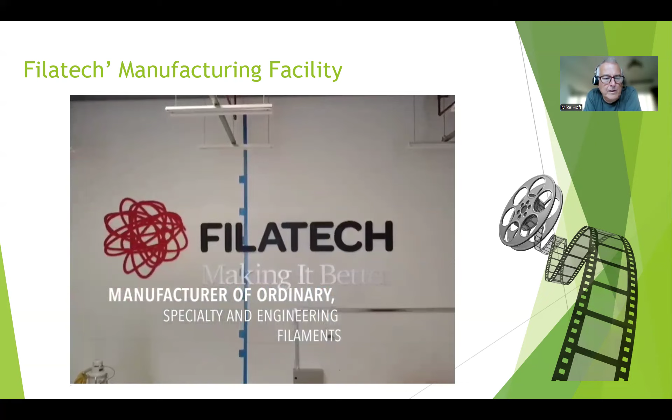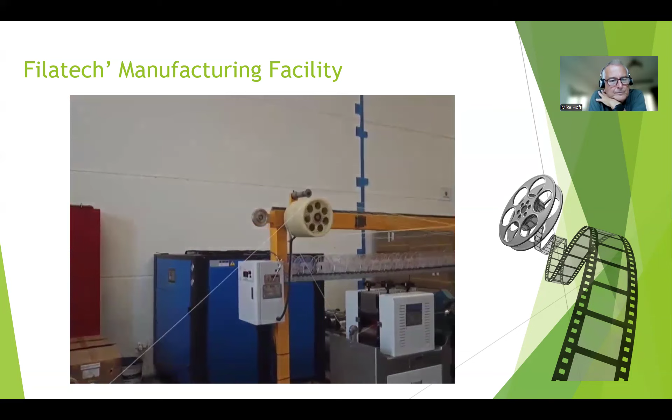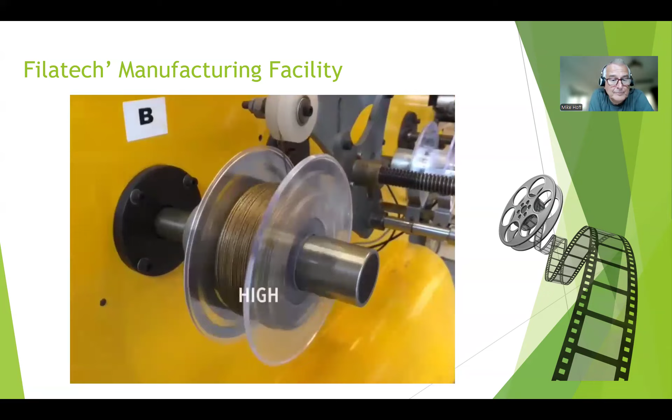Is the sound coming? Okay, how do I share the sound? So what you do is when you share, if you stop sharing and then press share again, under options it says share sound. Can you see that? As you press the share button, I'll take a photo and send it to you. But I'm sharing from a computer, so hang on, let me find it. So under options when you press share, at the bottom you get some options. I just sent the photo of it, you just click the button that says share sound. Unfortunately I don't see anything. I'll say all participants can share. How do I do that? Let me see once again because on computer it used to come automatically. Sometimes it does, share sound. I see that, share sound. Yeah, I got it. That's got it. No problem. Right, hear the sound? Feel like that's it, right. And then if you get stuck...

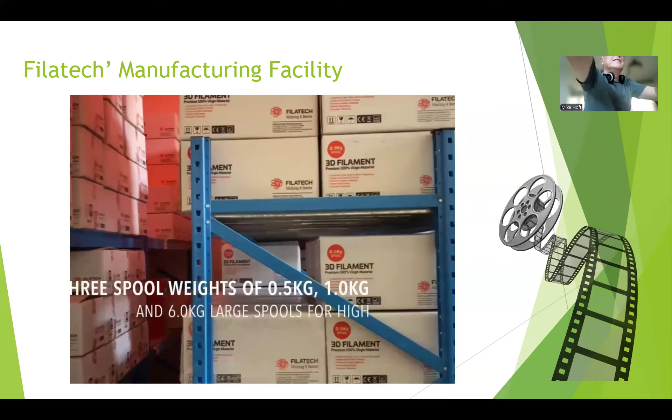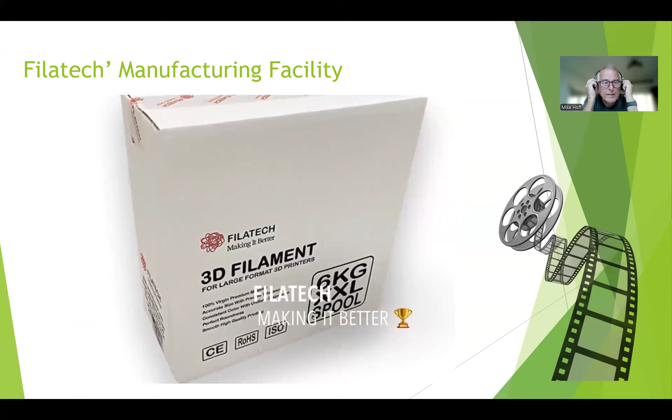Nice, that was our factory where we produce the filaments, which is used as a starting point of 3D printing. That means we start the entire supply chain of 3D printing. We produce the raw material and supply to the end users who use 3D printing machines to make objects, which they then give to end users for their use. So that's what we do, we're the raw material producer for 3D printing, and our product is called filaments, FDM filaments. You will come to know later in the presentation where it is being used.

So we started our journey in 2016 as a company established in Ras Al Khaimah, Al Hamra Free Zone Technology Free Park. In October 2017, the factory started operating and making filaments. In 2018 we started making ordinary filaments and special filaments, which I'll come to later, and we launched two additional products called wood PLA and fila engineering. Fila engineering is a special material used for end-use engineering applications, and some of our engineering materials have very big demand in UK and Europe. Also in 2018, we got a Best New Technology Award from Rakez. And in 2019, we started our UK sales operations.

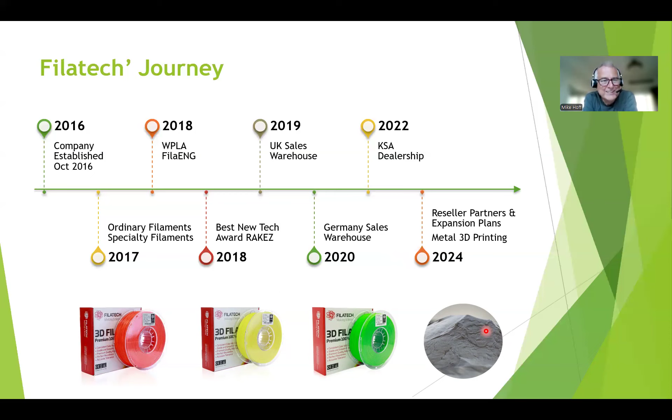Gotcha. For me, 3D printing is like progress. What I say to people is, long back, we used to make houses out of stones. We carve out, we live inside. But now we make in layers. Multi-storied buildings we make in layers, one layer at a time. So that is why I always say when we move from subtractive to additive, we are progressing.

Amazing. That's really good. I like it. I like it.

I'll come to how it is done later. For basics, why it is called 3D printing is it's like an extension of 2D printing. In 2D printing, you print on two dimensions, right? You have a paper and you print on the XY dimension. But if you add a third dimension, which is Z, layer on top of each other, it becomes an object. So that's why it is called 3D printing.

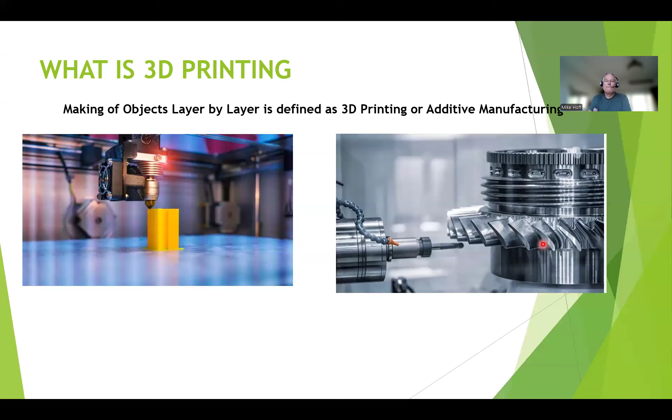Otherwise, the standard engineering term is additive manufacturing. Gotcha. So how is 3D printing done? This is a digital manufacturing method, an interface between digital and physical, as I say. You have something you design digitally in a computer, from a CAD or a 3D scan.

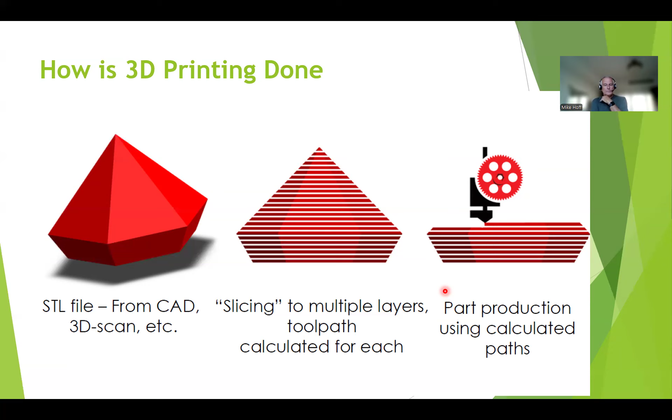I'll show you some videos of that also. So all 3D printing methods have this as the basis: digital CAD input, then slicing into multiple layers. And the technology differentiation is how these layers are formed and how they adhere to each other. That's the only difference. And sometimes the material is also different. So let me come to the next.

So classification of technologies, one is based on material. We have 3D printing in metal, polymer, ceramics, and concrete, and other materials also. That's the broad class. Concrete, yeah. There are buildings in Dubai, villas and flats, which are made using concrete 3D printing. Whoa, good God.

So the amount of heat input is different, the amount of stresses generated is different. So each material has a different type of classification, out of which I will say polymer is the easiest. And in polymer also different classifications are there: the normal polymer, the engineering polymer, the super polymer, all depending upon the temperature at which the material is being processed. Interesting. Sorry, it's interesting when you say that metal melts, and it's like, oh yeah, I suppose it does.

Yeah. And then it depends upon the type of raw material. Sometimes it is in powder form, sometimes it is in liquid form. There are polymers in liquid form, and the one which we use, we make the raw material in wire form. Some of them use powder form, so the technology changes based on how you feed it. Sometimes it is fed on a bed, sometimes it is fed using a nozzle. So many technologies, so many combinations are there.

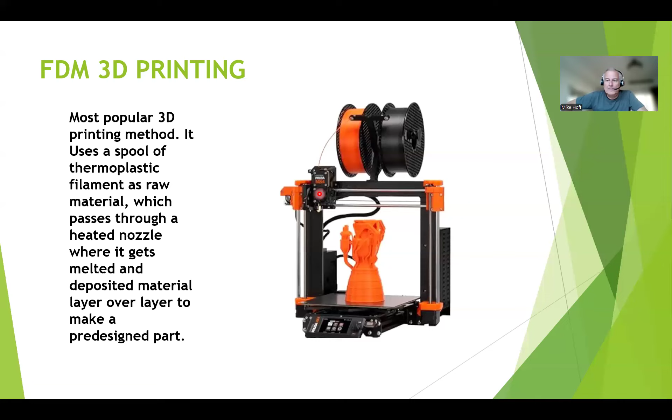And I'll show you some videos, then you will understand how the thing is getting printed. So I want to show you something which I printed. This is a 3D printing of a pen stand. Okay, and I have this. Can you see me here? Yeah, I can. So this is the same photo, I took it today only. Nice. I want to show you how this is printed.

You can download. There are so many free softwares also available. I can do it myself, or there are websites where I can go and download the design directly. So I just went to a website and searched for pen stand, and the design is directly available to download. So I downloaded it. So that means somebody has created and kept it for you as a repository. Yeah. And many people do it free of charge because they design it for somebody and then they upload it online. And some people charge for it, maybe a very small amount, like half a dollar, $1 and up.

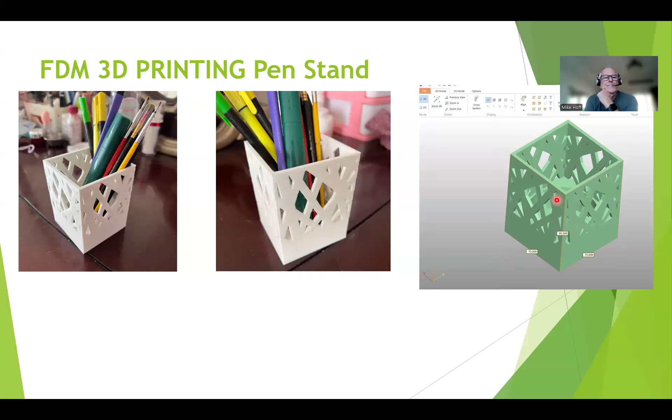When I say 300 by 300 by 300, I have a plate on which the printing will happen. The width is 300 mm, the length is 300 mm, and the height is 300 mm. Gotcha. So that's the build volume, and I can see it happening on my phone, and there is an AI thing. If something goes wrong, it will send a message saying this is not correct, or adjust this, adjust this. So printing has become like a sci-fi movie for me.

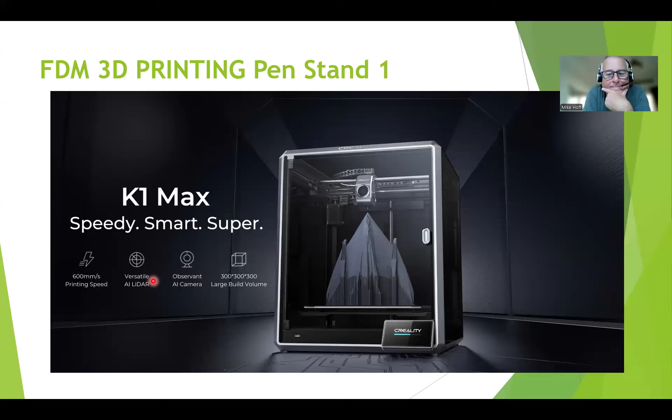When I started 3D printing, nothing was there, but now it is like a smartphone. How it developed from a touch screen to the smartphone we have currently, 3D printing is advancing like that. Amazing. Okay, so let me see.

So what I do is, as I told you, I have a slicer. A slicer is also a software where I import the 3D CAD model onto the bed. The bed is 300 mm width and 300 mm length. So I can put one, or let's say if I want to print 10, I can arrange them across and print them at the same time as well. Clever. I can print according to the build volume. Incredible.

So there are certain settings which I have to do, but I'm not showing all those things. I just imported it. And this is how the print will happen. And then this button, you know, this is called slice plate. So when I press slice plate, what it does is whatever is there in the plate, it will slice. I'll show you that in the next thing.

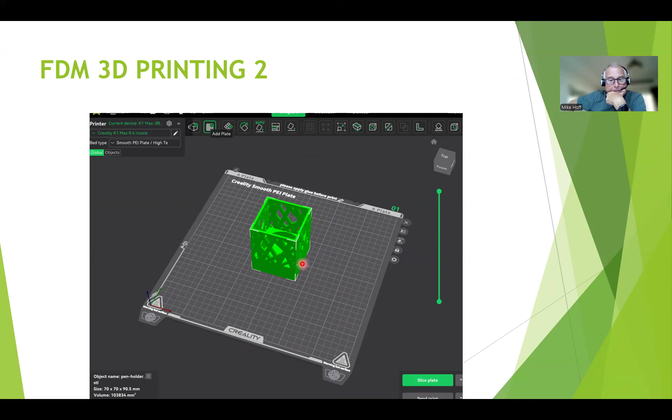So, okay. So I'm going to play it here. So when I press slice button, there is no sound. So this is sliced. So that means it has been already sliced. Oh, look at that. Oh my God, it is made into layers. I'm going to show you here each layer, what has happened. It is already sliced. The sliced information is already there, and I can rotate and see how it is sliced.

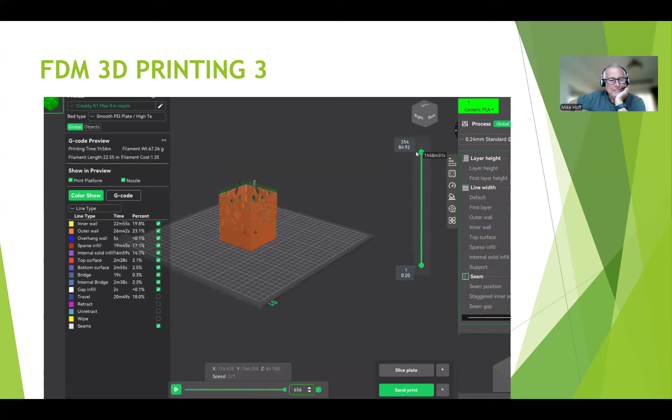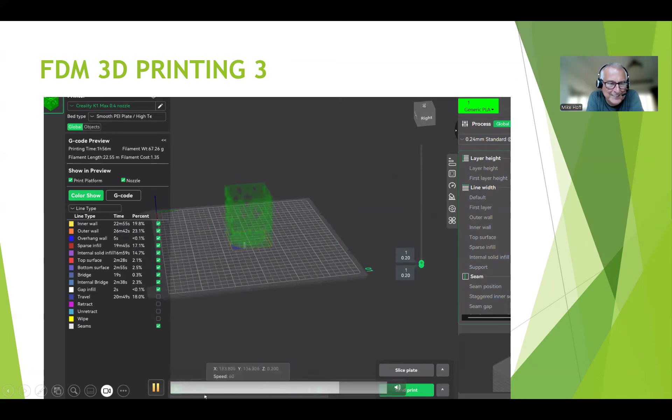Jeez, this is amazing. Yeah, this is how the nozzle goes, layer by layer, and when I go up layer by layer, it shows, and this is inside a layer. And if you see, there are 354 layers over here. Good God. And the first layer is like 0.2 mm height. I've no idea. Incredible. I love it. So this is how it is going, each layer, what is happening.

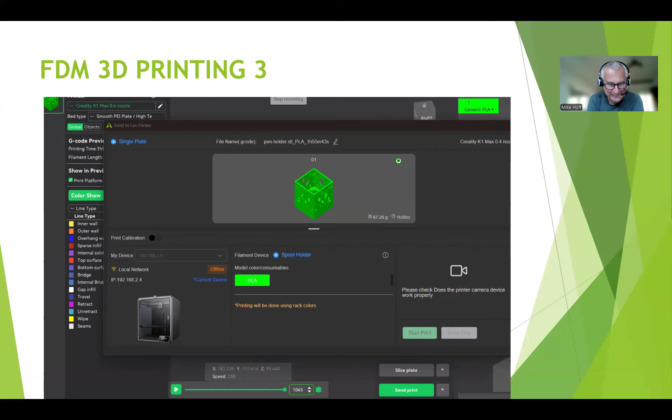And if you see, the height of the thing is around 90 millimeter. And so once I say send to the printer, it will automatically send to the printer, and then I press a button called start print. That's how it happens. It's like sending something to print from your computer. Yeah, I can send it. Sometimes I do it from my mobile also nowadays. And next, I show you how this is being made. It is a time lapse video of how this happened.

Fantastic. Let me go to the next slide. So this is the printer bed we saw earlier, and now you will see the video of how it happened. It will be showing time lapse, so you'll not see the entire thing moving. But the nozzle, this is where the nozzle is feeding the raw material. You will see only the ending of each layer. Just observe. So this is being made.

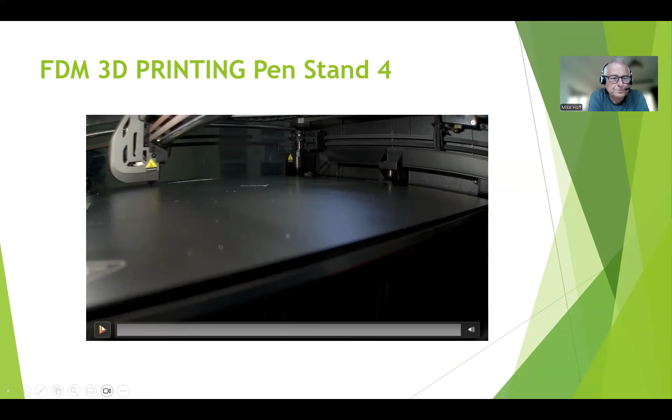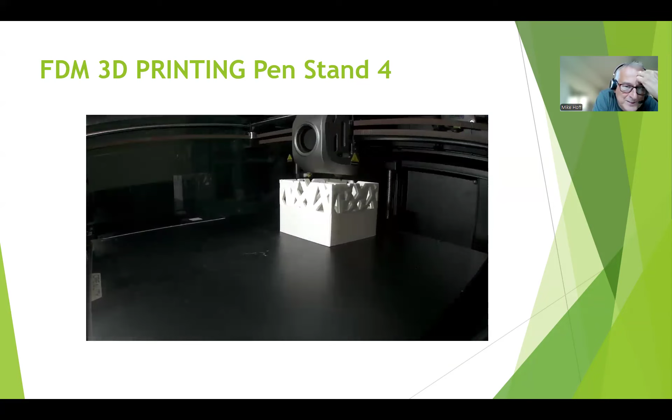Look. Wow. It's a 1 hour 56 minutes process, but it is going layer by layer, and it is being made. Tuck, tuck, tuck. God, look at that. That's incredible. Look, the gaps are coming now, in the video. So it's like one of the levels, then there's gaps. Got you. Correct. It's so clever. Yeah, pretty clever.

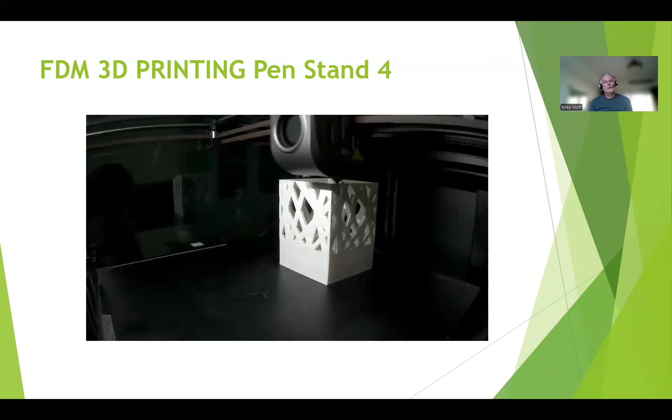So in a normal old printer, whatever would have taken around 10 hours of printing, the new printer does in like 2 hours, almost 5 to 10 times faster. Whoa. That's it done. Amazing. So I'll show you in a faster way, then you'll understand.

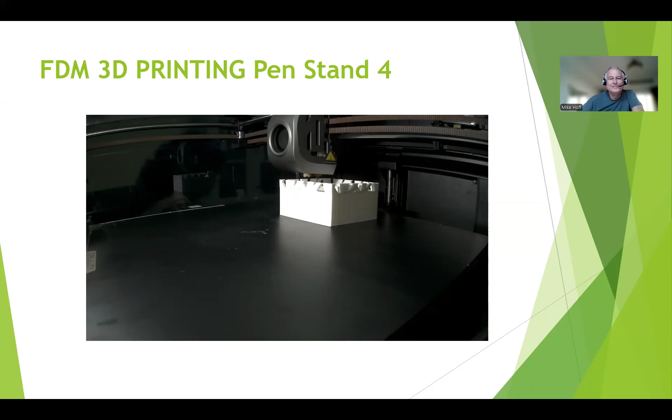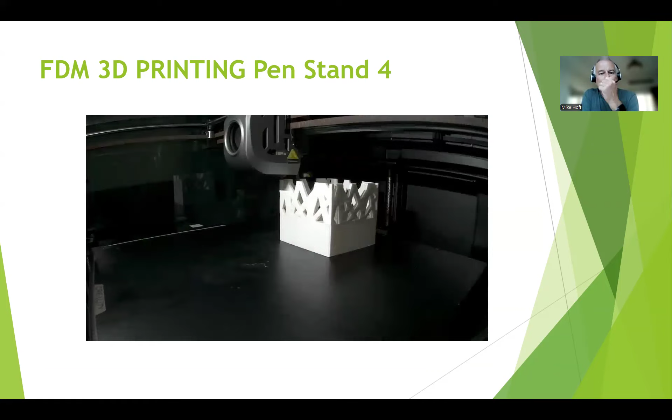See, the nozzle is on the same plane, and the plate, whenever one layer is done, moves down actually. You see this? So it's not the nozzle moving. The plate's moving. The nozzle is moving only on the XY plane, which is one layer, and the plate is moving down. It is like stacking of layers. So two-dimensional printing by the nozzle, and the third dimension is moving down. I get it. It is very clear. It's like something is emerging out of nothing.

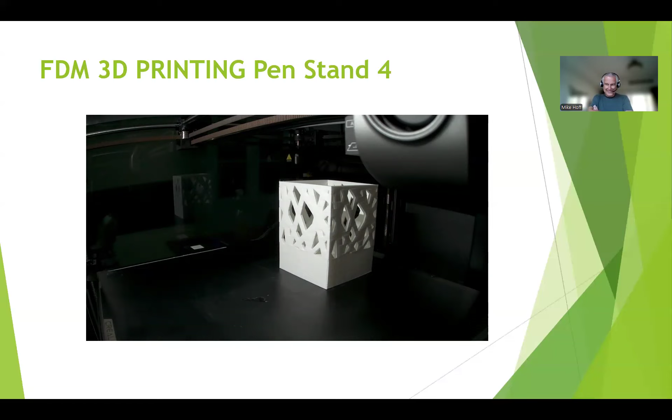That is incredible, isn't it? So that's it. Wow. And why I told this was an important story is once my wife visited my office, and then I told, okay, you're coming to my office for the first time, I want to give you some gift. So I downloaded it, and by the time she was there, in 1.5 hours, it got printed. That's amazing. Oh, cool. Look at that. That's so cool. So it's always on our desk now. That's brilliant.

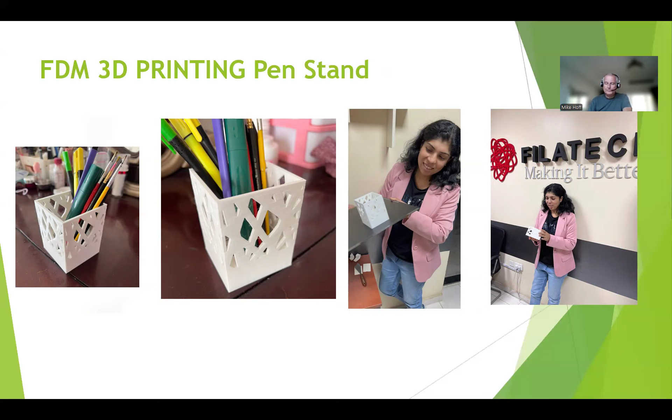So that's that. This is what FDM does, and it is a good tool for creators, makers, hobbyists, and it's not only that. There are so many customer segments where it happens. I'll just show you applications of 3D printing. The most common application of 3D printing is what we call a service bureau.

A service bureau is a company who will have multiple 3D printers in his office. I have people who have 350 3D printers here running continuously. Crikey. If you go to that, it is like a farm, and it is creating parts like that. Yeah, it's called a 3D farm. There is one guy in Sharjah who was importing these seals, like O-rings. He was importing those from China, and then he found 3D printing is very cheap.

And then instead of importing a container from China, obviously the cost of that material is less, but you have to ship from China to here. Each one may be costing him 10 fils when it is landed. But when you have to ship all the way from China to here, he has to pay the money in advance. He has to wait for 3 to 4 weeks for it to come. He has to store it. Storage is a big cost.

Now what he does is he has some 180 3D printers, FDM printers, and prints it in situ. So when a customer gives an order, next day he can deliver, and his money is not stuck. He just needs to invest in raw material. That's genius. These kind of guys are called service bureaus. They get requirements from the market, they have 3D printers, they buy our raw materials and they do the printing.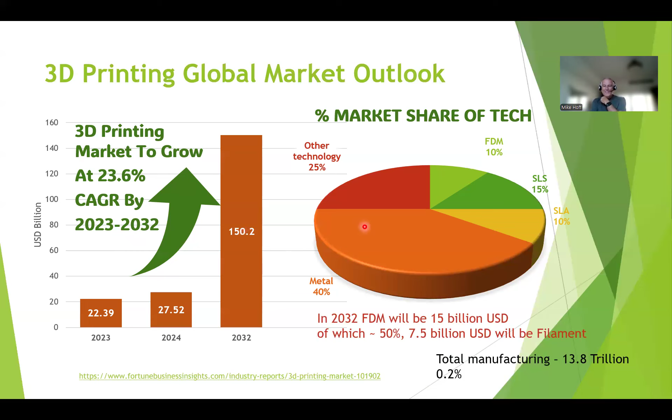Okay, so coming to benefits of 3D printing, obviously rapid prototyping. With rapid prototyping, I mean you have a design, you always draw it on paper, but unless it comes to the physical level, you won't be able to test it in the market. This 3D printing helps to do that very fast, from design to first prototype. Earlier, I know people used to wait.

I had a project when I was in Wipro in metal 3D printing. There was a new design of an aircraft small jet engine. If they were to make it using conventional methods, it would take a minimum of 1 year because the material has to be imported and processed. We did that project in less than 4 weeks.

The entire jet engine, the small one, was assembled as a working prototype in less than 4 weeks. That's very, very fast prototyping we can do. And it was a working model, not just a model which looks like it - a working model showing that you can take product to market very fast.

Then there's design freedom. When you have this, you can design it and manufacture it, almost anything, though there are certain constraints. Engineers get design freedom - they can design according to what they want, not according to what can be manufactured. Earlier it used to be design to manufacture; now it's design according to what you want. That's the freedom designers get.

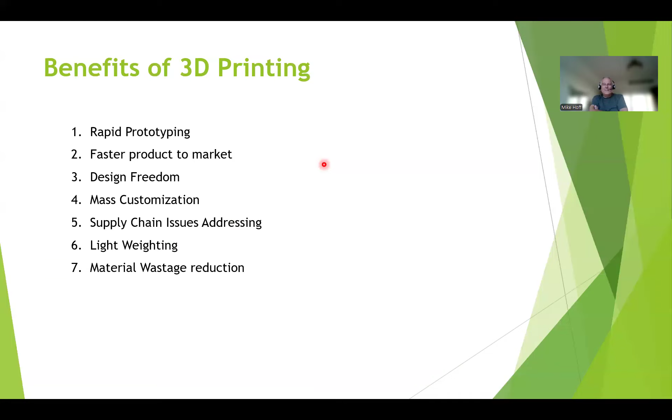I love it. These are advantages of 3D printing and benefits of 3D printing. I can go on, but sure, sure.

Disadvantages of 3D printing, I want to touch upon here. As I told you, it's just a manufacturing method. It has to be used where it is applicable.

First disadvantage is printing speed cannot compete with mass production. Let's say I printed this in 1.5 hours, which is very good comparing that I have to go to the market, buy the material, come back. But when you're producing in mass, this component will come out in 1 second. So 1 second and 1.5 hours is never comparable.

So there is always a speed gap. 3D printing has not reached - even though it has reduced from 10 hours to 1.2 or 1.5 hours, it is not ready to compete with mass production. So if it's the same part I'm producing in 1 million units, 3D printing will never be cost effective. Costs are still high for materials and machines.

Another disadvantage is not all materials can be 3D printed. You find a lot of materials across, but not all of them can be 3D printed. So there is one limitation.

And then when it comes to aircraft and mission critical applications like space, aerospace, there are a lot of prove-out and certification requirements which are still unaddressed. Because if I'm doing casting or any other process of manufacturing, we have 300 years of data available for each failure mode which has happened earlier, and the safety factors have been incorporated. But 3D printing is like 40 years old, and we have not seen many applications, so the failure modes are not fully identified.

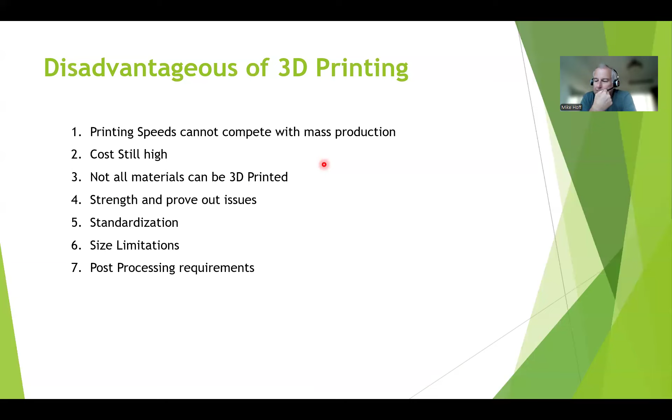And then coming to, as I was telling, 3D printing in UAE is still in its beginning stage. 2013 is where the first companies started establishing - that's like 12 years back. And now there are around 100 companies doing 3D printing, including manufacturing. We are the only manufacturer of 3D printing materials in UAE.

Others are using our services. And in fact, almost 60 of them got registered in the last 3 years. Wow. And then the biggest industry which got transformed in UAE is model making.

So there is a company called Artistic, and Dubai is all about real estate. I mean, there is no denying that fact. It's all about construction and related to construction. And model making is one industry which got ultimate benefit from 3D printing, because when a project is launched, you need a very nice model to be displayed in a place, and you need these small, small models which have to sit there.

There is a company called Artistic in Sharjah, which still employs more than 100 people in making those models. In addition to that, now they have around 100 FDM 3D printers, and around 10 3D printers in a different technology, due to which their model making time has compressed from months to weeks. Let's say they want a model to be made in 3 months, now they will make it in 3 weeks.

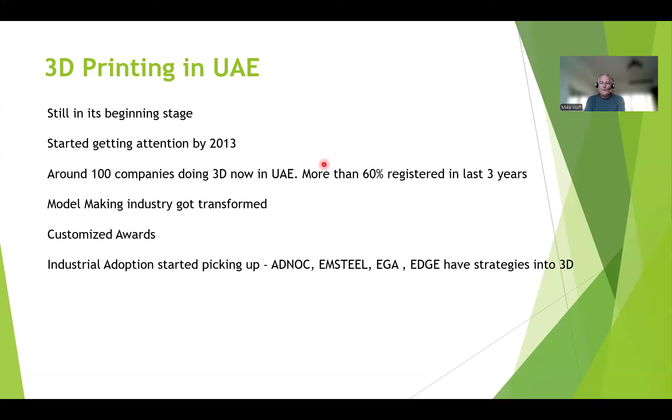The top's broken where I dropped it. If I had a 3D inventory of that, I could send it to the 3D printer and be done. Yeah, and that will be done, you know. So, very good. That's how companies have adopted it. The digital transformation is happening. Maybe in the next 3-4 years, we will see more things to come.

Okay. And this is incredible. What I think the future will be for 3D FDM, which we discussed already, is that it will come as a commoditized item, like a normal desktop printer. Maybe 30-40 years back, nobody had a desktop printer in their home. They used to go to some office and get it printed. Now everybody keeps a desktop printer at home. So like that, 3D printers also will become available at home.

In fact, I have one at home, and then designs will become available digitally. Like I told, this design will be available digitally. So all the parts which we use, like a doorknob or something, will be available in digital format, which you can download, send to the printer, and get it done. Amazing.

I see that in the next 3-4 years, students in primary grades will start using 3D printing. Two decades ago, it was available only in the top university labs. Now in the USA and Europe, it is available for engineering students in the normal labs in engineering colleges. Now, the next level is all primary students will start using 3D.

I still remember I started using a computer when I was in fourth grade. Now for people in fourth grade, a computer is nothing. So they will start using 3D printers in fourth grade, second grade like that. And 3D printing will become very cheap, standard, and very easy to operate.

Now, there are still some nuances of how to operate. You have to load it, and all those things. It will become like you put the thing in as a cartridge, and the machine will automatically take and load it. Things are happening like that. It will become very easy to operate, and standardization and certification will come. And the size of 3D printers will start becoming big. More materials will be available.